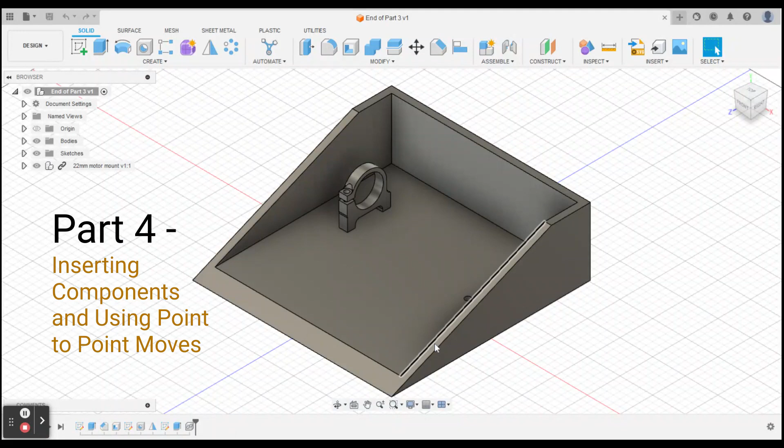All right, we're at part 4 of little things to learn in Fusion 360. Last time we cut this wedge in half to make this profile, then we inserted a motor mount on holes using the point-to-point feature. Now we're going to insert a motor, a hub, and a wheel.

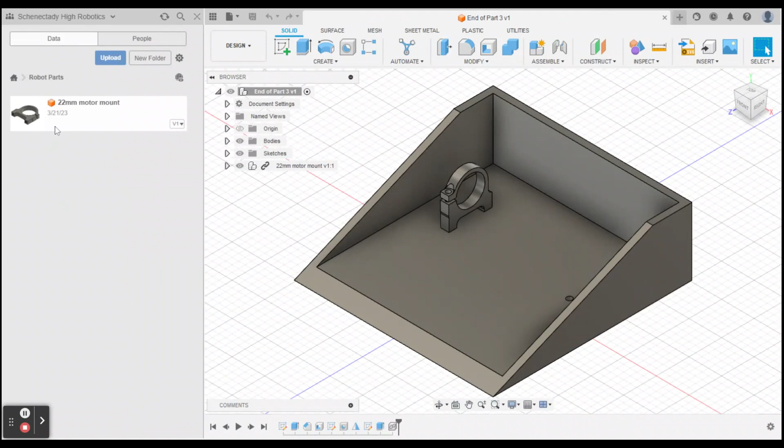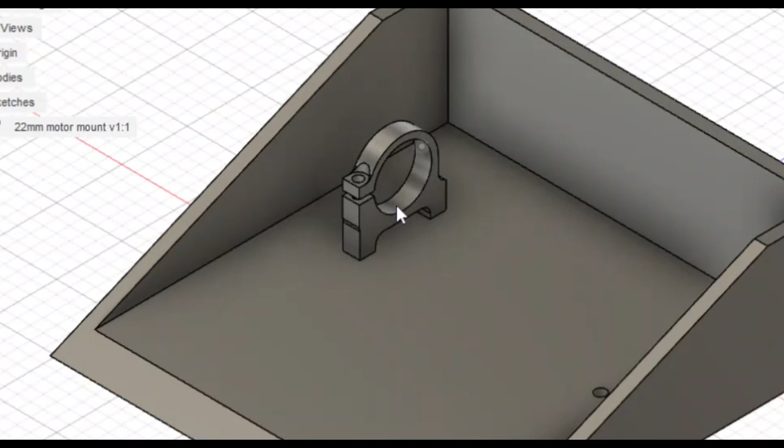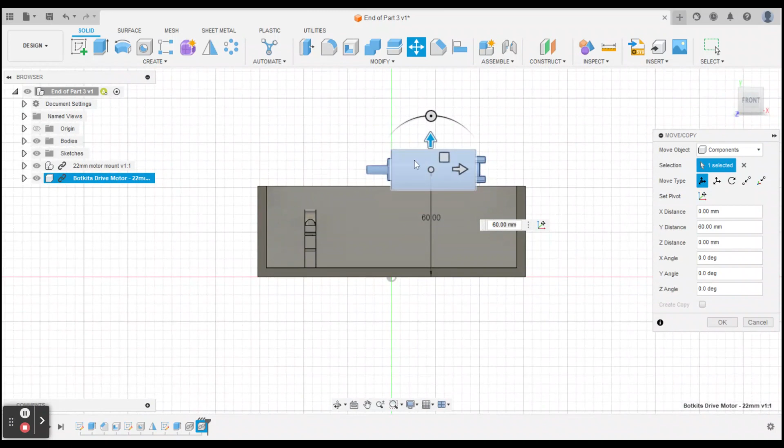We're going to right click on the thing we want to insert into current design. We'll close this data panel. Now we got to do a point to point again. It's already facing the correct direction, which is great, and now I basically want to see the front of this motor. I'm going to hit point to point over here.

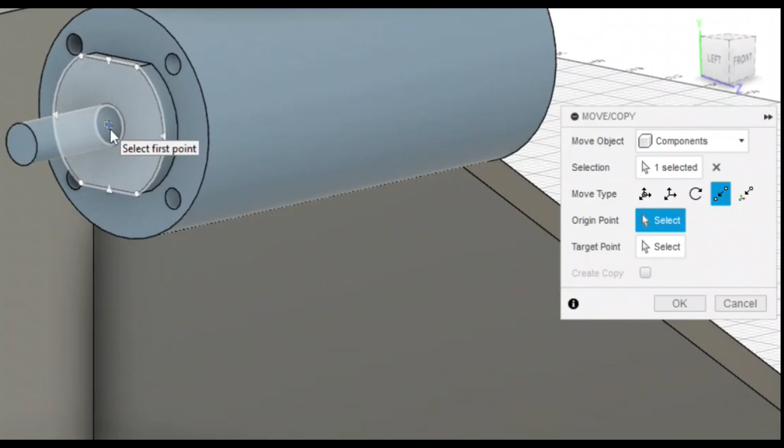I'm going to zoom into this face right here, this little oval shaped face. Not this face, but this face. I'm going to hold down control again so my mouse doesn't change. I'm going to click this point, that's the first point here, that's the origin point. And now I want to move it to a target.

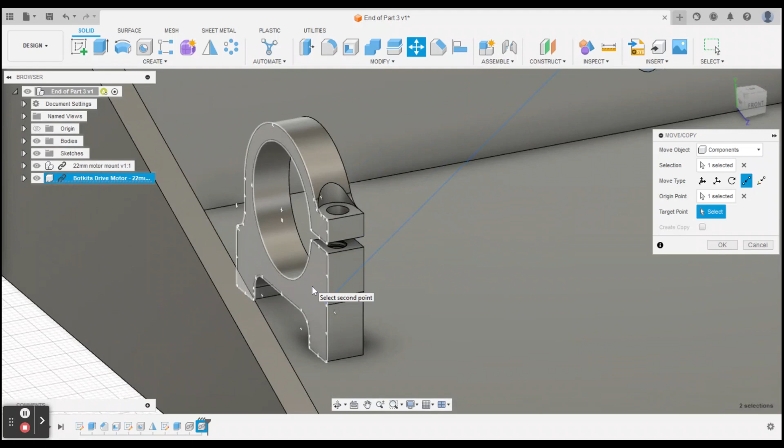Where do I want to put it is this hole right here. I want to line up this face with this hole. So I'm hovering my mouse over here, I'm going to hold down control, I'm going to go right in the center. Don't click that, it's this one right here, the little crosshair. And now my motor's there. See how this face lines up with this face of the motor mount? Awesome.

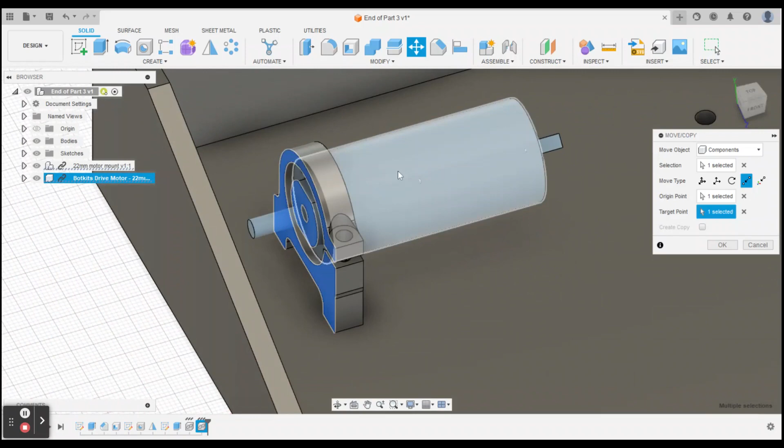And now it's still not over enough, because you want this to clamp down a little bit on the motor. So I'm going to click on free move, slide this over a little bit using the arrows so it stays on this plane, just like that. Let me see. All right, that looks good. So I moved it over minus 6 millimeters, I moved it 6 millimeters to the left. And I'm going to hit OK. I'm all done inserting that motor.

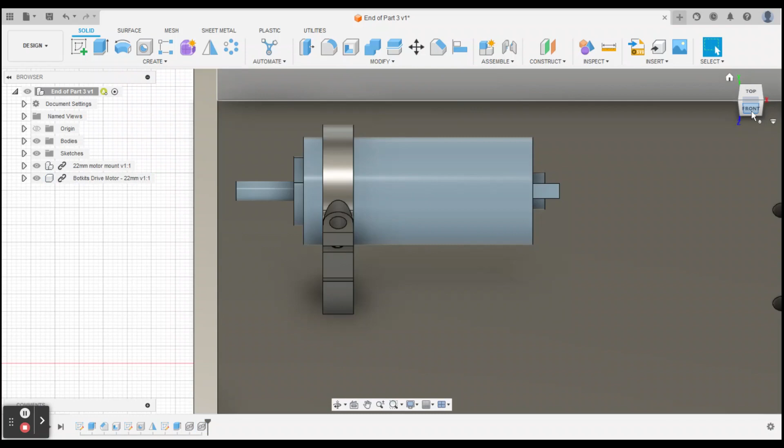Now I want to insert a hub. A hub is something that the wheel sits on. So this little bar spins, then you got to put something on this bar, and then you got to put a wheel on that.

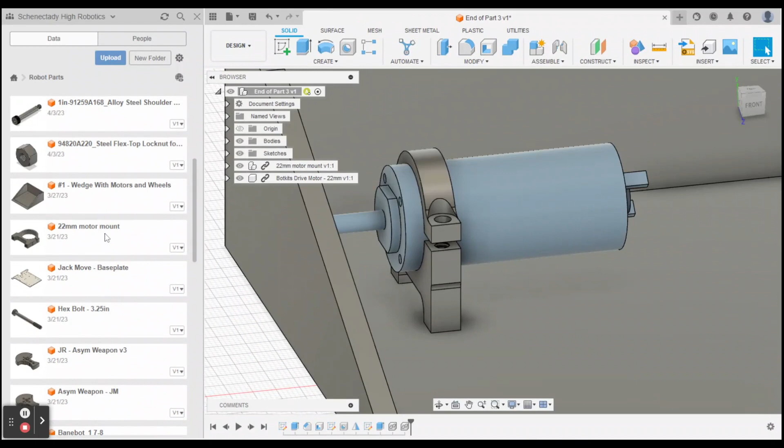So open another part or find another part. We are looking for a hub, something called a hub. Right here, BaneBots 4 millimeter hub. Right click on it, insert into current design. Here it is. We'll close this tab right here.

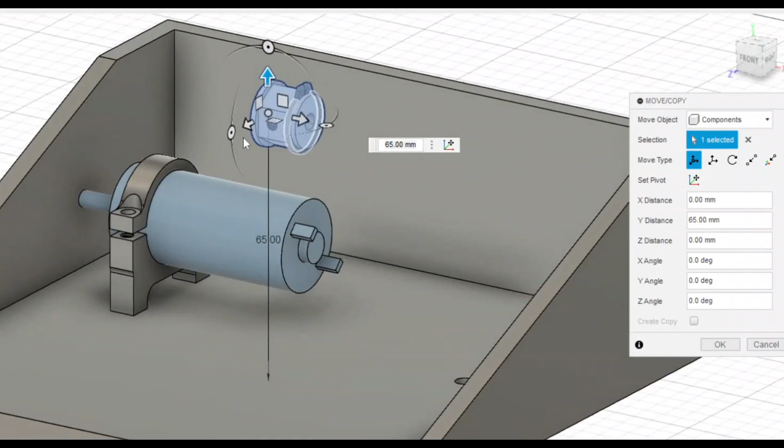Now if I lift this up again to get a better view of it, it's facing backwards. I want this flange, the flange is the round part that kind of hangs off that's bigger. I want that flange up against the face that we clicked on before.

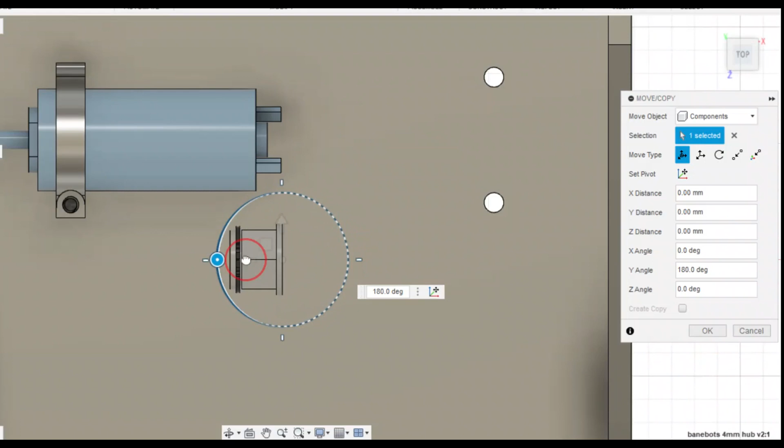So first thing I got to do is turn this around. I'm going to click on top so I get a good view. Now look at it turning, I'm going to turn it 180 degrees. You know that number if you played any Tony Hawk or something like that. And now I'm going to do a point to point because I got it facing the direction I want. I'm going to click on point to point over here.

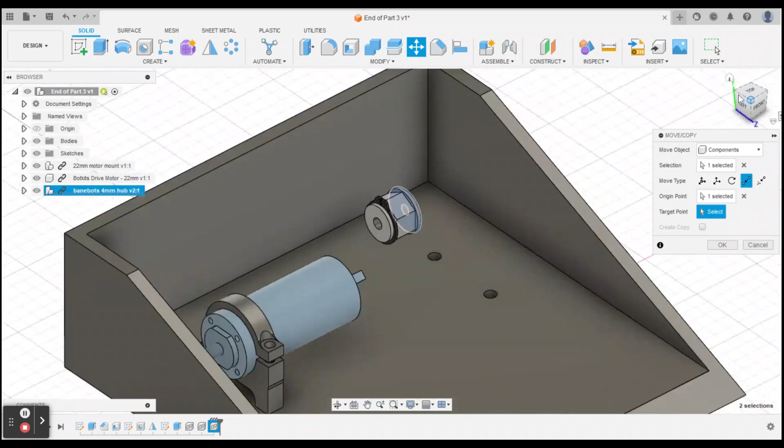All right, I'm going to be on this face, so hold down control, click on that center point in that face. Then I want to be able to see this motor, and right on this face, I'm going to hold down control while my mouse is over it and then click on this crosshair. Boom, now my hub is where it needs to be. Okay, hit OK, and I'm done.

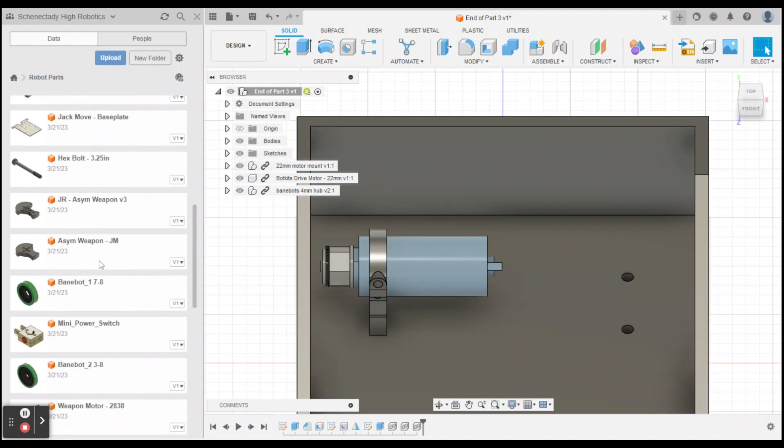Now I'm going to add a wheel. This is the one we want, BaneBot 2 3/8 of an inch. All right, it's a green wheel, kind of can't miss it. And the difference is, all right, BaneBot 2 3/8.

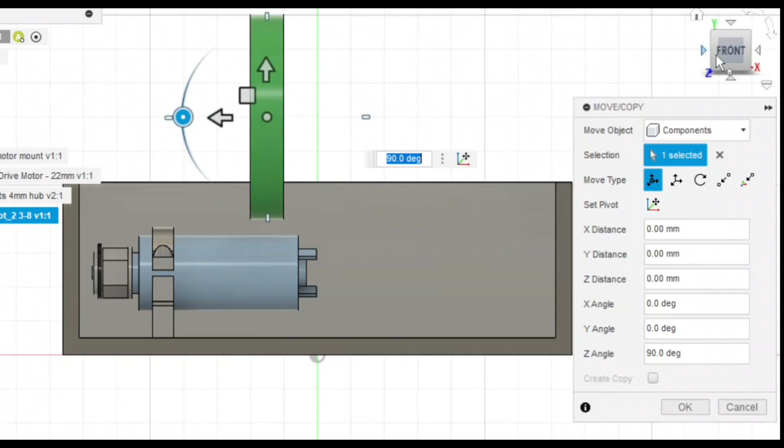So again, I'm going to right click on it, insert into current design. Again, it's not in the orientation we need it, so what I got to do is stand it up using this arrow. So I'm going to turn this 90 degrees, looking at that number right there change. Now it's perfectly straight, and then I'm going to line up this face with the motor mount. So I'm going to do point to point again.

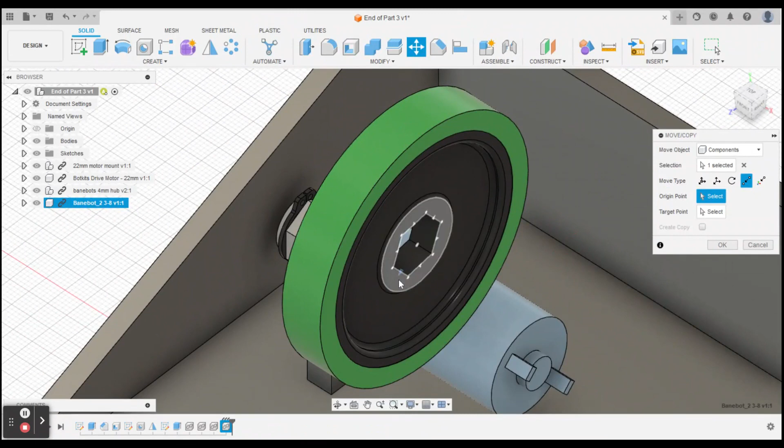See, I'm not clicking on this face, I want this face right here. But first let me close this data panel. I'll click on the mouse wheel to move it. Hover my mouse over this face. I'm going to click in the center because that's what we're lining up. Again, I've got to get a view of this.

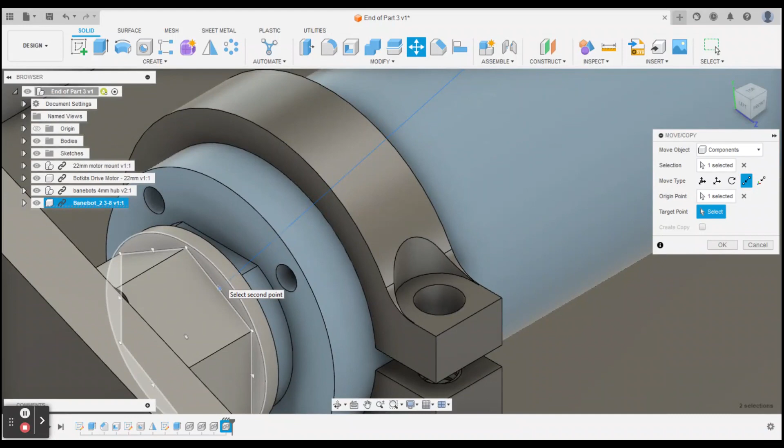So where do we want to put this on the wheel hub? Look closely, it's this right here. This is where the wheel is going to stop. You're going to slide it on, and it's going to stop right here. So I want to line it up with this. I'm going to hold down Control and click on this center right here. And boom, I got my wheel where I want it to go.

Now, here's the thing. I noticed that it didn't look exactly right. You could kind of see these lines intersecting, which is not what we want. So I'm going to hit OK to be done.

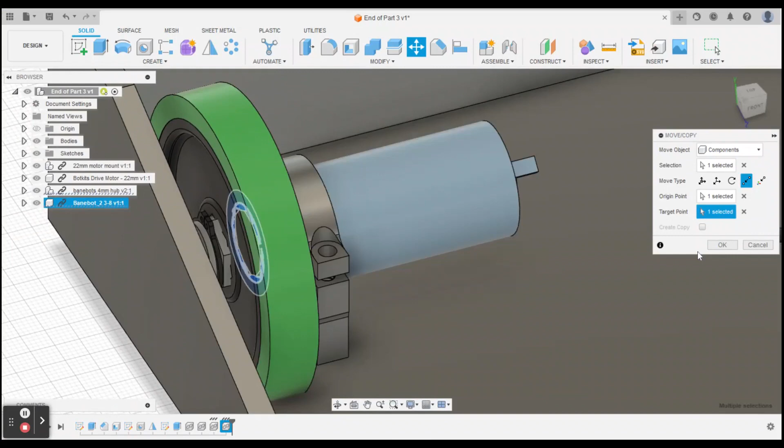Now to get rid of this whole body, I've got to click on these, these are the bodies. I'm going to click on this eye. Click on this arrow, and this is body one. I'm going to rename it - I think we should have already done this, but I'll do it again. Chassis. Oops, I can't spell. C-H-A-S-S-I-S. That means the body.

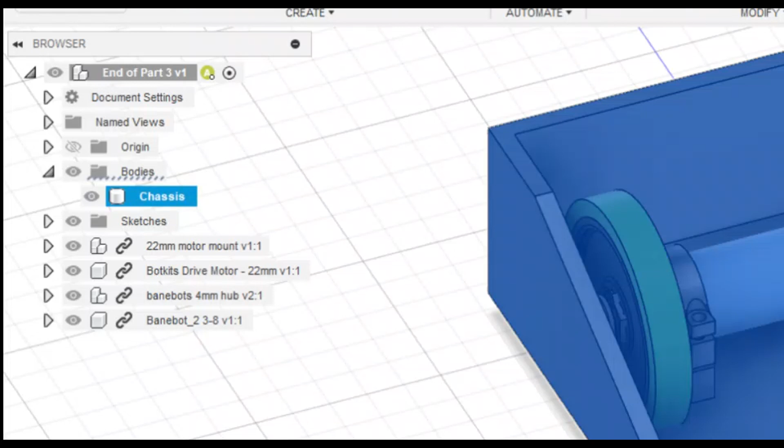Now if I click on the eye next to the body, that means it's no longer visible. If I click on it, it's there. You'll have a list of bodies later, but right now we just have one body, so that comes and goes. So we want to get rid of it for a second.

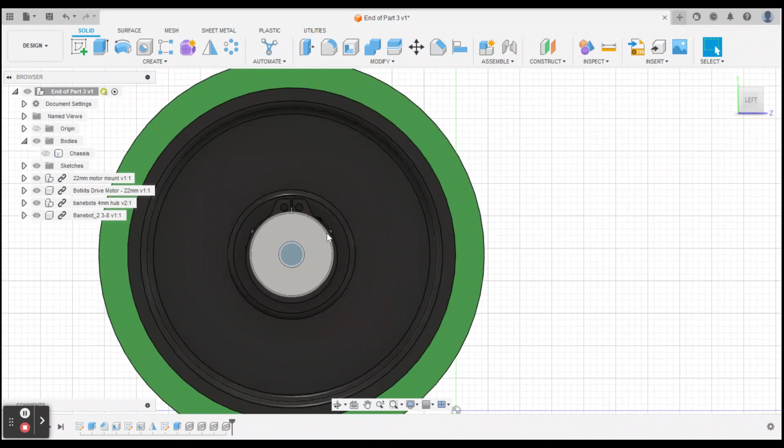And then I'm going to hit left, so I can look at this kind of straight on. Actually, I'm going to drag just a little bit so I could see. I want to rotate this wheel so it lines up. So what I'm going to do is right-click on the tire,

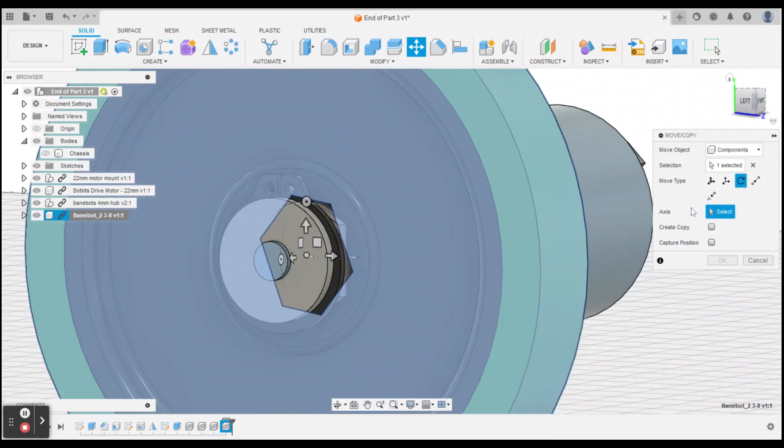click on Move and Copy, and then this pops up again, but now we're going to rotate. We haven't used this before, but you see this over here? It's called rotate. And now it's saying, hey, what axis, what circle do I want to move on? And you just got to pick any circle that's within the wheel. So I could click this circle line, this circle line - they're all the same, okay.

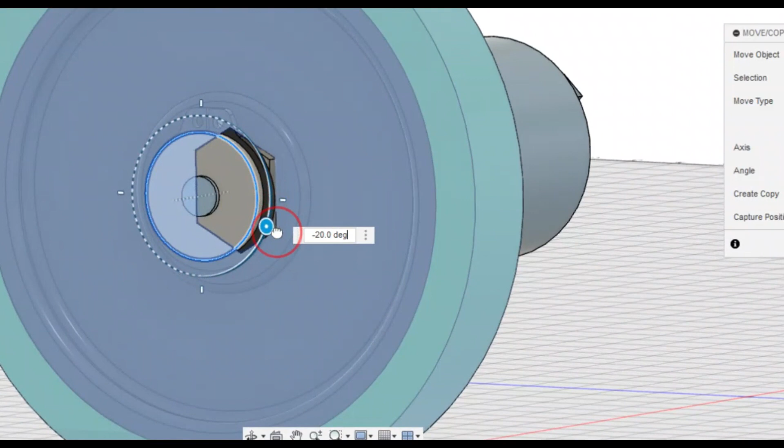So I'm just going to click on this right here, and you'll notice I'm going to drag this wheel, and now the wheel is going to turn. Let's see, that looks good, kind of lines up. I'm going to hit OK. See how that looks? It's almost okay. For our purposes, that's good enough.

Okie dokie, and now I'm going to hit the chassis eyeball again.

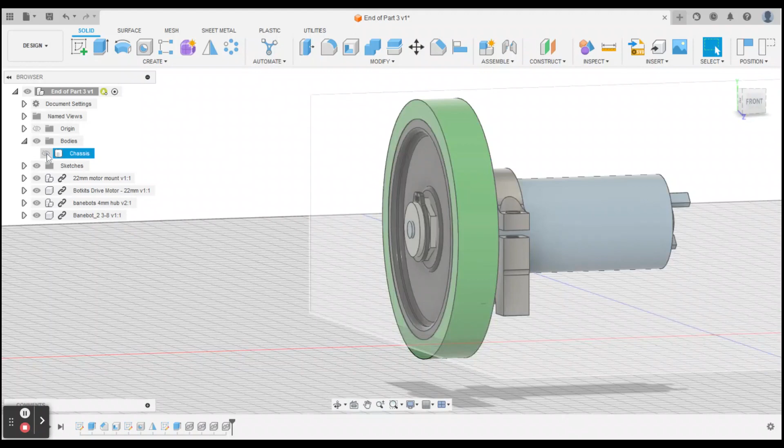Students - all right, so you'll notice that I need a hole in the bottom of this. So if I click on the eyeball next to the wheel, see there's kind of nowhere for the wheel to go. It just kind of pops up through there.

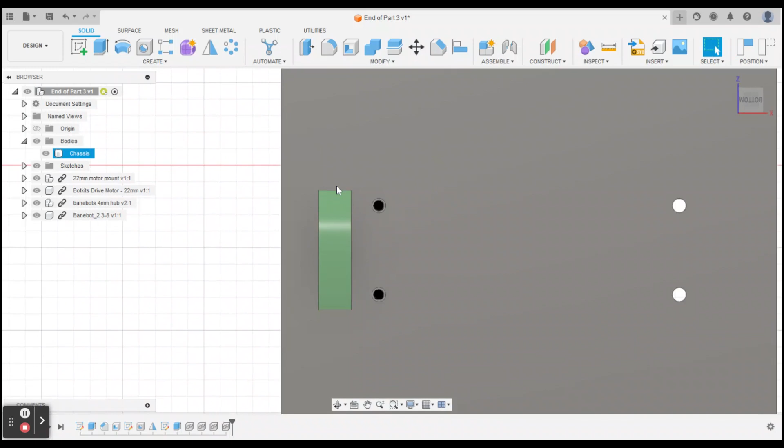So what I need to do is, with the wheel showing as best as I can, I'm going to create a sketch on this bottom face right here and make a rectangle that's a little bit wider than this wheel and a little bit longer, so it goes through. So I'm going to create sketch, click on the face of this. This might pop up - if you haven't saved it, always click capture position. And now it wants me to draw a sketch on this face.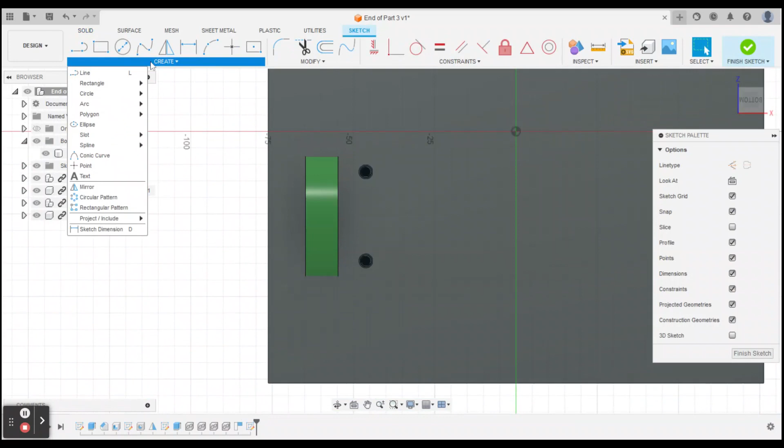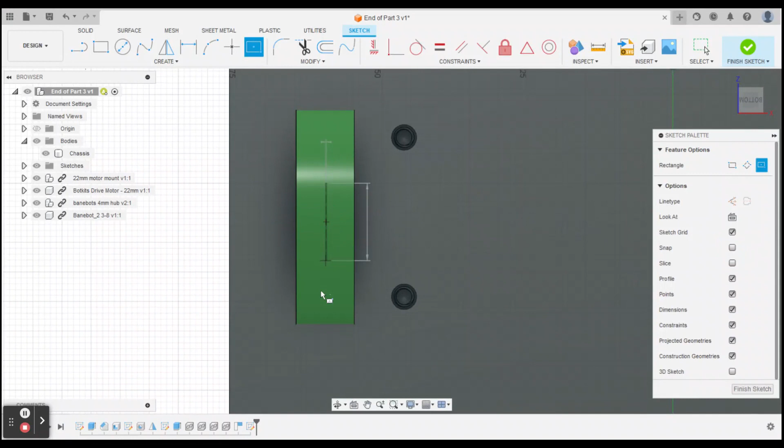I'm going to draw a center rectangle, so create center rectangle, and I'm going to try to click somewhere in the middle of this wheel as best as I can. Sometimes it locks - you see over here where it says snap? If I get rid of that, it won't snap anywhere. I'll click right here what I think is the middle. I'm going to go down - I want to be past the wheel, a little bit wider than the wheel.

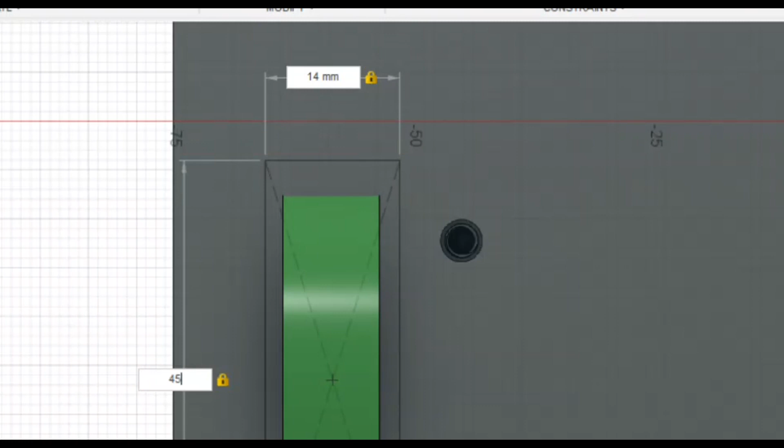So that looks good, let's make these specific numbers. So I'm going to make this 13 - oh, let's change that to 14. I'll make the other one 45. Actually, let's make it 48. 14 by 48, hit enter. And now I've got this section here. I'm going to hit finish sketch.